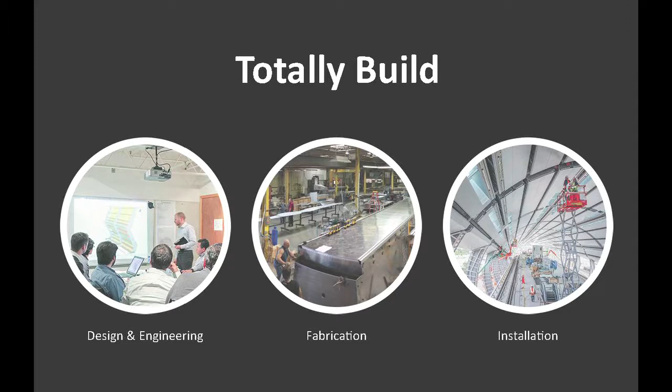So Zahner, kind of what Kramer was alluding to, I don't even know where we fit into this world of contracting, because we really are a unique company. At the end of the day, we're a sheet metal contractor, but the type of projects that we specialize in, which really came about in the last 20, 25 years, starting with a personal relationship Bill Zahner had with Frank Gehry, really got us down this road on inventive architecture, got us in the forefront of using digital tools, and it all revolves around being able to be part of the design process, then fabricate and install. And we do this to varying extents on different projects. Our approach going in is what's best to serve the project, and that differs depending on the project.

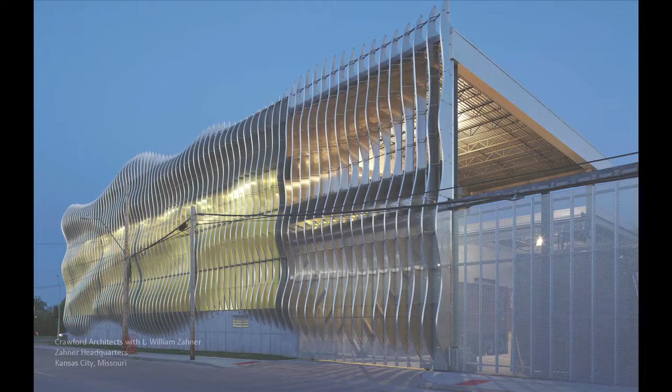We're headquartered in Kansas City, Missouri. Like I said, we've been there. It's 4th generation, going on 120 years. We do have a facility right outside of Dallas where it's mostly production, finishing work. This is our building in Kansas City. We did recently, a couple of years ago, an expansion of the shop floor itself. So this was our way of saying, this is what we do. We designed, engineered, erected this facade, and it's for the shop. It's something we wanted to celebrate because that's really, I think, what sets us apart. We're the ones building it.

Oh, sorry. So Bill Zahner himself, he's written 2 textbooks, really references for the architectural industry. If you haven't seen them, I'd encourage you to look for them. And I was kind of interested too, what's our mix here in terms of students and professionals, practicing architects? Got it all? About 50-50. Good, yeah. So this is really a strong reference in terms of thinking about metals as a material, different properties. And we've been building all over the world now, primarily in the States, but more and more we're seeing a demand for this type of work all over.

But let's start in New Mexico. This is the project that Kramer was talking about, the so-called turbulence house. Steven Holl project, he called us up and said, I've got this model, and I want you to scale it up, make that back wall 22 feet, whatever it is, and let's do it. So he sent it to us. That's where we start. We had to scan it in, do a laser scan, and it was an interesting proposition because now it's quite literal. There's glue marks, there's creases, and within the scan, it's at such a high resolution, you actually are seeing that. And there were cases where, just very subtle shifts in the geometry, and now you're in the position of, well, what's really the intent here, and what was just some guy's finger holding it too tightly.

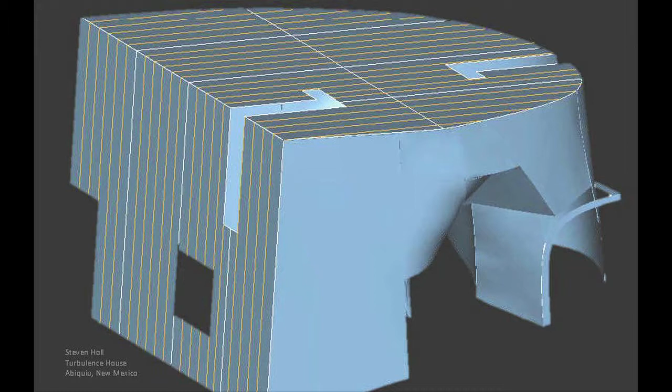And we had to go through, and a lot of time and energy was spent in kind of rationalizing this model, getting it into a shape that we could build from. And this is, like you're saying, 2002, I think. It was still rather primitive in terms of technology. But we had already established this type of construction, which is why we had been working with Steven anyway, and it's why he approached us with this project. So you can kind of see this, it's a mix of planar surfaces, which are fairly straightforward, essentially stud wall construction. And then these curved surfaces is really where we are using what we call our ZEPPS technology, and we'll see some more examples of that later.

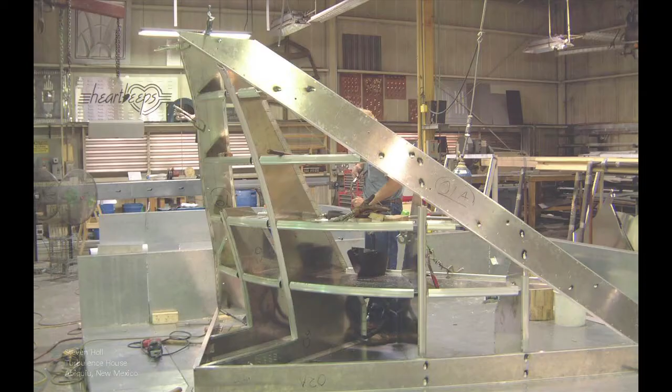But it's our way of slicing this volume up into sections that essentially we're bound by what we can ship, more or less. We work within the geometry and then the constraints of shipping. But this will show you how we think about it in terms of cutting it up and making it into sections and actually fabricating. So it's in the computer model. We can export the data directly to CNC equipment and then assemble it into very accurate geometric forms. That's what you're seeing here. So the other advantage is, we try to push as much of the work into the shop environment as possible. So this is the waterproofing layer that's going on in advance.

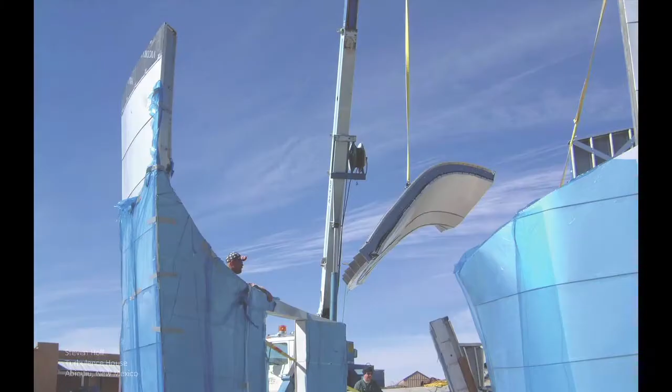And then construction. This had its own constraints, I'll say, challenges. But essentially, it's prefab. We were given a slab to work with. And these are self-supporting structural panels. So really minimal equipment for what this was. Everything pieced together, very simple construction.

And we're creating really just a shell. It was the fins that defined it. It was the structural members. And then this was also pre-clad. It's a galvalume, it's called.

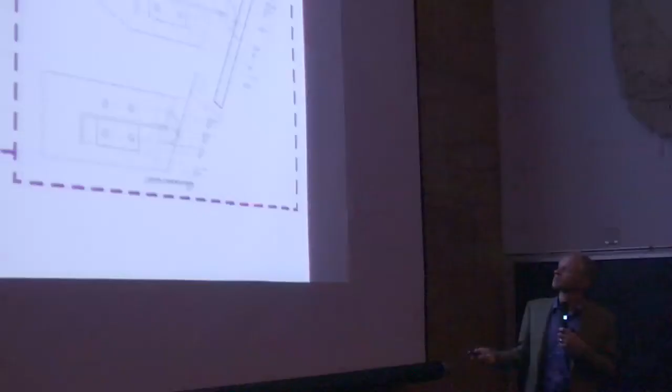So essentially, the project, it's more or less a standard shell of a department store. The client was called Liverpool. They're the #2 department store in Mexico. This is a new development that they were co-anchoring with the #1 competitor. So they wanted to really make a statement with this building. That's why they hired this architect.

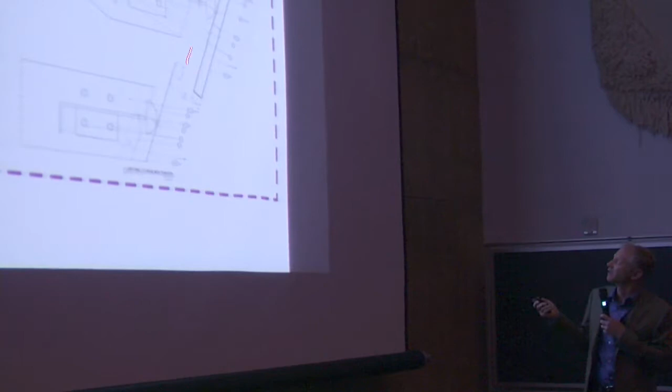And the way we started to look at it was, and we'll see some more geometry, but it lent itself to just slicing it vertically, having profiled ribs, and then connecting these ribs with horizontals. And this was our way of creating geometry. So we've got a structural system, which we had input on the design, and then everything you see here is within our scope. So that's how we're actually slicing the geometry, creating parts, creating assemblies.

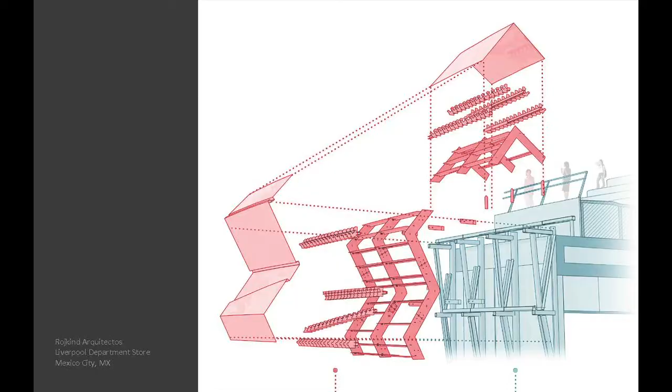In this case, it's Mexico City. We're not installing it. And beyond that, there's not really a precedent for this type of work down there. This is where that strong ownership came into play. They had a precast contractor, did a lot of work with them, and basically imposed this project on them. So that guy came up to Kansas City several times, lots of mock-ups. But it made us think of it a little bit differently than if we were performing the work.

So everything, just for efficiencies, had to be flat packed. There were still 18 semis or truckloads that went down there, but everything individually packed. So now the emphasis becomes, how do you document this? How do you make it as foolproof as possible? And then what's important in the geometry?

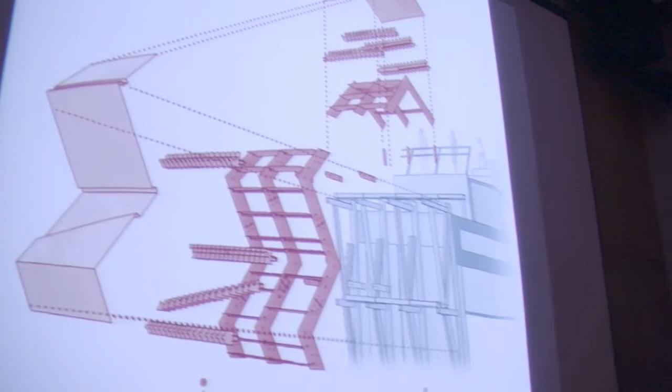We're going to see some more examples of this, but I wanted to point out this is the only thing that we actually pre-assembled at our factory in Kansas City. When you look at this overall surface, and we'll see it a little bit later, what became really apparent was anytime geometry came together, any kind of edge, and even generally speaking, that's what we focus on because that's what your eye sees. That's the critical part that has to be right in the field.

So we said, okay, anytime there's an edge, we're going to pre-assemble these. We call them shark fins. It's a subassembly with CNC cut pieces assembled into a unit that fits onto a particular spot.

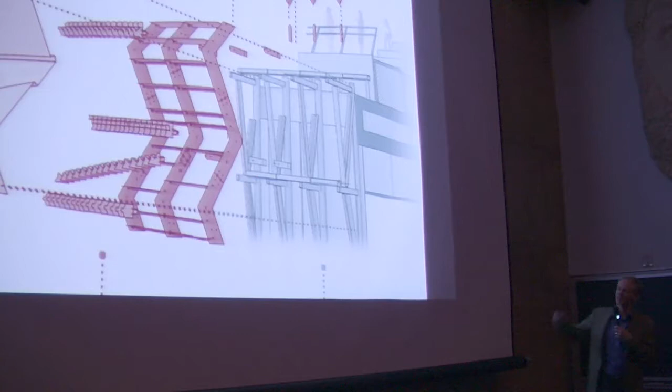And so when we're actually fabricating, let me step back a little. When we're fabricating, everything's done in a model, data is exported, and it becomes essentially a jigsaw puzzle. There's slots in here, corresponding tabs for the connecting parts. We get to the point where we're labeling on each one of these the name of this member. And once you see the geometry, you'll understand that every single one of these pieces is geometrically unique. There's a very slight degree of dual curvature.

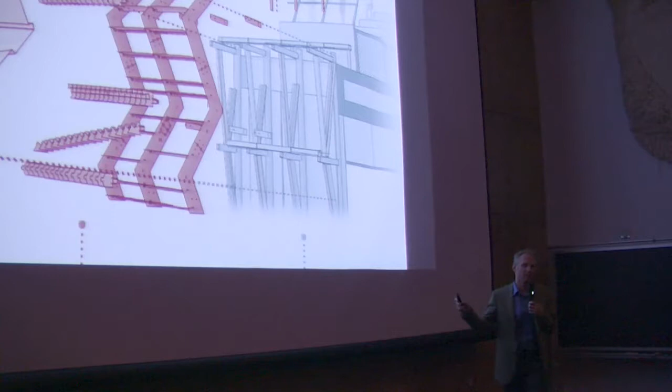So really important, and generally speaking, our approach is we don't try to rationalize the surface more than it has to be. We don't try to dumb it down or make it into consistent units. We don't mind the complexity. Our approach is we'll develop the computer tools, the automation to be able to handle a complex project like this efficiently.

And I really can't overemphasize the importance of mock-ups. Not just for us in terms of construction, but when you're talking about metals in particular, it's just very, very hard to really get an appreciation of the light characteristics, things that can't really be rendered. So mock-ups are always critical.

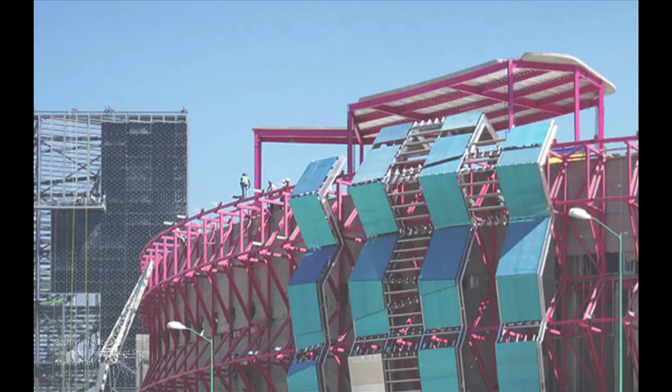This is some of the assembly that we were doing, right? So the pink, and for whatever reason, this client, all of their structure is painted pink. So here we go with our scope. We worked very closely with the structural engineer on the design of this system. And another kind of general statement I'll make about our approach to building complex geometry, we want to keep the steel as simple as possible.

Generally speaking, we're very confident in producing geometric shells ourselves. We've done many iterations of that. We know when we produce the parts, it's exactly per the model, and we've constructed that surface very precisely. The tricky part is getting back to steel. So there's always a lot of different cases, and the approach we came up with here was having these outriggers. It's what anchors the system together.

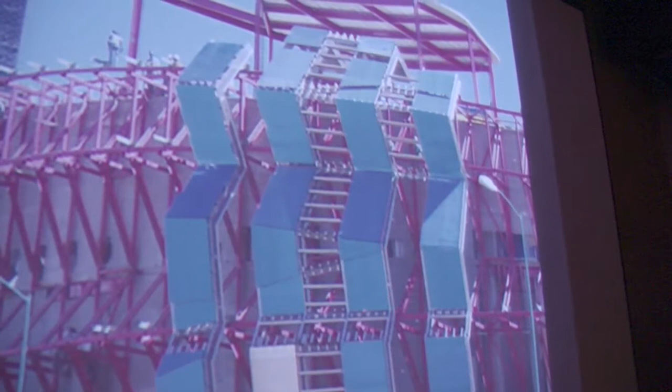Having those set in the field, and what we identified very early on in this process and communicated to the owner was that you need a very good survey company. That's going to be the critical link that makes all of this work together. And that's another role that we play when we're involved early in the design process.

I said we're confident in the geometries that we're building, so we have to be part of the conversation with the structural engineer on what is the tolerance of the system. We'll design that connection, we'll own that anchor, but there is a limit to, on the structural side, what's allowable. And it's not a straightforward conversation.

The types of buildings that we're typically doing don't conform to an AISC tolerance. You can look up in the code and say, I've got a 10-story building, I get 1/4 inch every floor. It simply doesn't apply in most of the projects that we do. So that's a whole step in the process, educating the structural engineer, the steel erector, what the requirements of the system are.

And like I said, we shipped everything individually here. A critical part of what made this a success was the installer had a facility about an hour outside. So he would take every other bay, pre-assemble it at his facility, and could then just hang it in place. So on a typical vertical run, there's 3 individual assemblies that have 4 anchors apiece. And then it's just a matter of infilling with these horizontals.

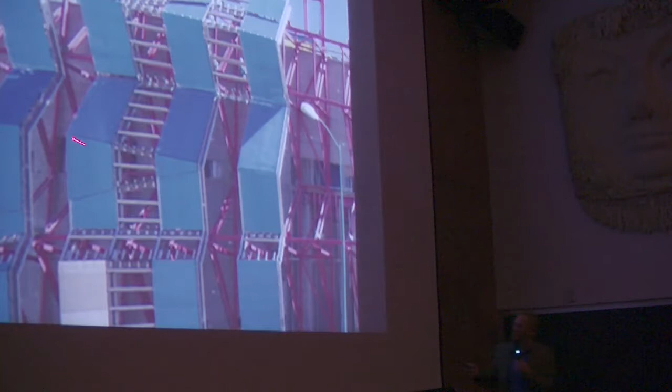And then this is that shark fin that I mentioned, that sub-assembly that is very precisely defining the edge. And that gets followed all the way across every geometry change. We've got that defined. And more assembly. This is very large scale. And it also lent itself, we picked the middle of the building, said you can work both ways out. We needed to put a lot of people on this at one time.

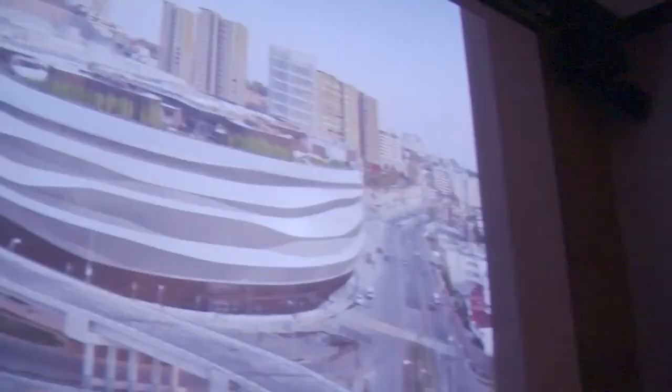So the solid part that you're seeing is actually just a sheathing layer. So we've established this framework. They're sheathing over it with aluminum, it just happens to have a blue plastic coating on it. And then there was a stainless steel skin. So now it's taking shape. You can see all the edges being defined. And this is still not clad in the final skin. It caused an uproar. People just couldn't understand what was going on here. That's the final project. So all of these that you're seeing are actually a stainless steel skin that gets applied over that sheathing layer.

And each one of those panels is unique. It has its own number, its own geometry. And again, that's the strength, the capability that we have to have internally. How do you automate this process? Getting the geometry is one thing. How do you automate getting 8,000 stainless steel skins out, just the files, and then you have to make them.

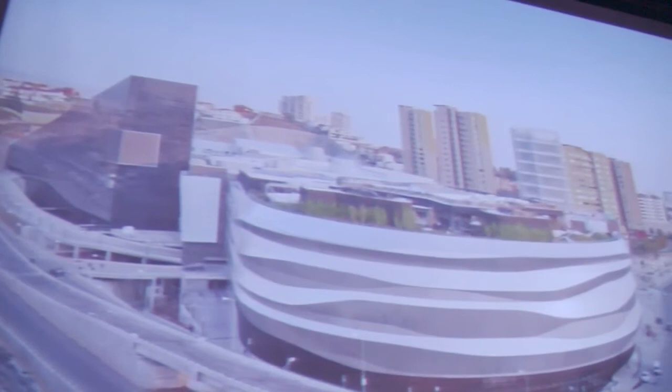But that kind of speaks to the type of project that we do, the scale that we're capable of. This turned out to be just an enormous success for the client. This is actually their number one competitor over there, and this whole development is known as the UFO. It's been completely branded, and in fact, Liverpool itself has undergone a rebranding effort using this type of imagery. So a complete success from the client's perspective as well.

Yes? What's the aluminum layer underneath the stainless steel you're doing? Yeah, good question. This is kind of common construction for us. It's what you're actually fastening into. You've got all this framework here. We're not trying to dictate with that panel that you have to go into, essentially, a stud, if this were a stud wall. So instead of having to find that stud, we're saying give us a sheathing layer, and you can fasten that panel anywhere you want.

So it's important too. When we do more conventional construction, we like to specify plywood sheathing, depending on the type of system, so that you're not having to find the stud and it gives you flexibility on where you're attaching. So is the stainless a standing seam, with fasteners? It was not, and I don't have a close-up of that. It's what we call our inverted seam. So it's kind of a pan. Returns are made inside, so it's a totally flush system with all concealed fasteners.

Very clean. And when you think about it, we're having to pre-make them with the curve in each one. And probably I don't have it on the scale that you can really appreciate. They were 30 inches wide, each individual panel, 16 gauge stainless, with what we call an angel hair finish. And I think I have some examples later on.

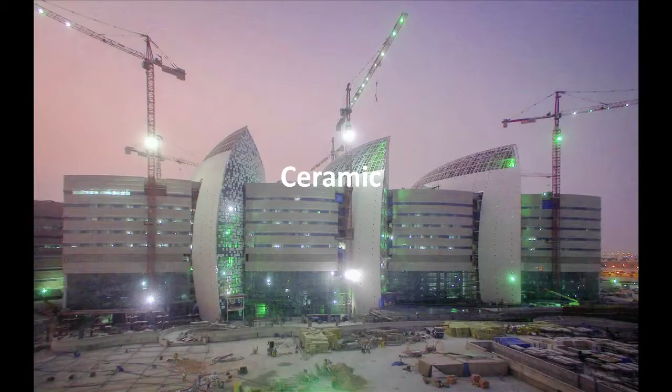More and more we're doing glass. This is a really nice project, and I'll highlight it a little bit later on. McCoy Federal Building in Jackson, Mississippi. We actually did not own the storefront, but all of this glass around here was part of our scope. Ceramic: this is a project in Doha, where we used our ZEPPS technology to define these surfaces, and where we might typically put a metal panel on, this had terracotta tile.

Aluminum, this is the Modern in Fort Worth, the Ando building. We did this as a really nice, clear anodized aluminum. At this scale and thickness, you have to be very particular about the alloy. And what goes along with that is the panel system itself. Flatness was the overriding criteria, so that governs the thickness of the material and the mounting system behind it.

Bronze, this is Bowdoin College in Maine. We did a bronze plate that we applied a chemical patina to. Copper as well. This is, again, copper that's been chemically altered, patina applied to it. There it is.

Couldn't come to Albuquerque without a reference.

But it's true. Chemistry is actually very important to this type of process. So this is the weathering steel that we had on the spaceport building. Lots of copper and copper alloys where we are chemically inducing a patina onto it. You see these cathedrals with 100-year-old copper roofs, some really nice, rich green patina.

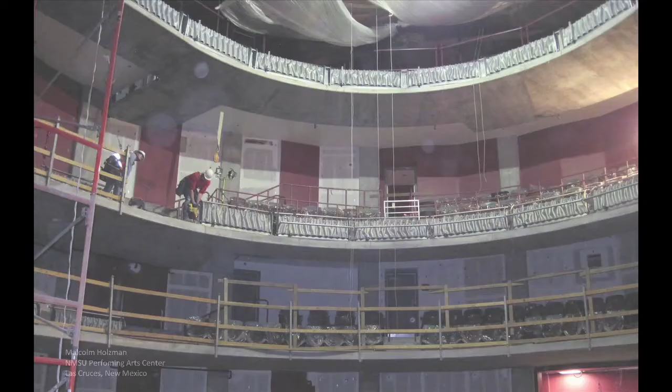This is actually not far. This is in Las Cruces, New Mexico State. We made a series of railings. Malcolm Holzman was the architect, and did this series of railings where the infill was this frozen mesh material. That gives you a little better view.

We actually ended up having to hire that original artist to make these forms. We just couldn't, it's one of these things, again, you can't specify it. It's something that you just have to have an artistic ability for. So occasionally we will bring in artists into our process.

We'll talk a little bit about the de Young, really important building for us and for the architect. We owned all the copper, but then we really owned much more. Our scope was the entire envelope, with the exception of the skylights. We owned the complete exterior. So again, mock-ups, lots of mock-ups. This was a really interesting process.

Herzog and de Meuron, because they're really tactile. They like to play around with materials. So they'd take plastic sheet and heat it up and press different shapes into it just to see what they liked and how light would respond to it. And they'd send that to us, and then we would simulate that, alter some tooling for the shape.

So one of the things I wanted to point out, and this is a very early mock-up, all the variables. So the other thing that we have to interject into this design process is constraints. And in this case, there are a lot of them. And just on this panel, it's copper, but how thick is it? The thickness that you choose really sets the limits to the depth of this bump, which is another variable.

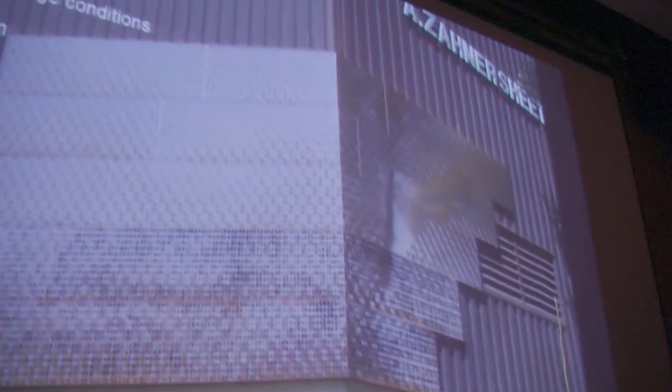And then how many steps are you going to take within this depth? We've got bumps in and out alternating, and then a certain number of steps within that. It's a very strict grid system. People are always amazed at these wild Frank Gehry surfaces that we do, and I tell them, you can be a foot off on the Gehry stuff, and no one's ever going to know.

And you cannot be off at all here. It's a 400-foot-long facade, and we're wrapping the corner, and that corner has to be between the grid spacing. I mean, there's zero tolerance. It's a pre-manufactured panel. There's no field measuring in this building at all.

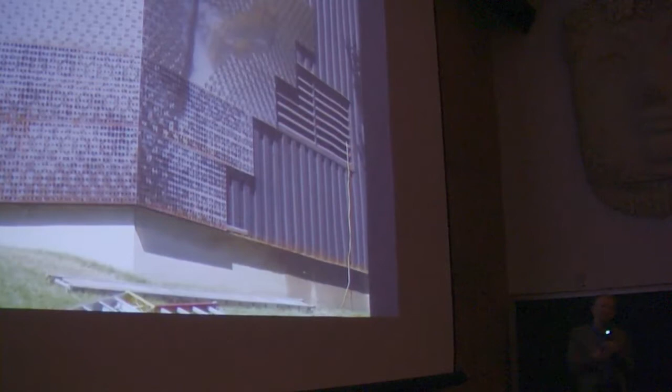So, there are panel restrictions: how wide, how thick, how long. That has to do with tolerance constraints in our equipment, but then also on a practical level, how are you controlling flatness? How wide is this? The corners themselves. We decided that we had to literally fold that corner in within one panel to get that edge that they were looking at.

The fastening system itself, again, no exposed fasteners. So it's actually a very clever system that we used, because the flip side of this is we're installing it. It's got to be efficient to install in the field. And that's another reason why you have to see this through the entire way. There could be on paper a very clever way to fasten, but if it takes twice as long to install in the field, you've killed yourself. It's not even worth doing.

So all of these constraints are kind of interwoven too. When you change one, you're impacting others. So it's part of the design process. We just have to go through, figure all these out, and then communicate back to the architect. And that's where we really have to find out what's crucial to the design intent.

Which do you prefer, the more precise stuff that you're showing now, or the more wow, Experience Music Project, for example? That's really hard to answer. I mean, as an engineer doing the challenges and so forth, in one sense, it's almost a luxury with this because it's about precision. And so we can think in those terms and we can quantify everything. We can go through and say, we need X amount of tolerance in this connection because of these variables. So you can follow that through.

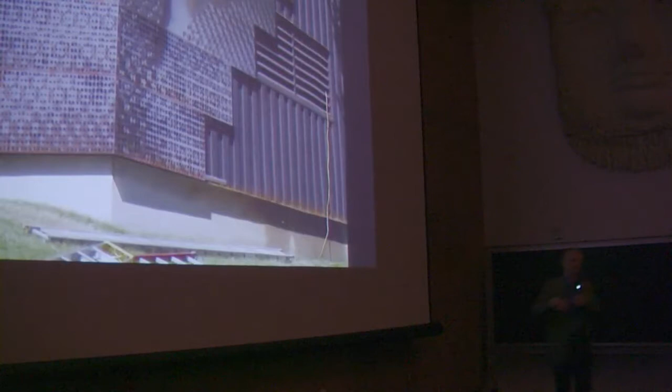How often are you actually doing the weather wall? You're usually a skin that's held off the face of the... It all depends. On the de Young, we were the waterproofing layer. So there's a stud wall, there's a DensGlass sheathing, and then we owned everything outboard. So that was the waterproofing membrane, and then the panel system itself. The panel system is designed to take water out. By design, we're not letting water even to the waterproofing layer. It exists, and there's good reason it exists, but that's not the primary barrier.

Do you have freezing problems there? Not in San Francisco. It's a common issue that we have to design around. Gutters, a common case, depends on the project. Minneapolis, for example. I don't know how that's guttered. We've done Gehry projects that have internal gutters, where it'd typically be maybe a 20-foot welded assembly. So you're dealing with discrete units. If freezing's an issue, heat trace is actually fairly common, so you're not building up ice.

We owned all the glass. We owned all the glazing frames on this. We were essentially a little GC out on that job. We had 10 or 12 subs under us. And this was all really design driven.

The glass frame itself, it's custom, but it's made of conventional, that's a channel. It's a pipe with a T welded to it. That's a T section. They're all standard shapes. So we had a miscellaneous metals subcontractor making glazing frames, sourcing the glass itself. It was very comprehensive. There's a TPO roof under the copper roof that we owned, the entire envelope.

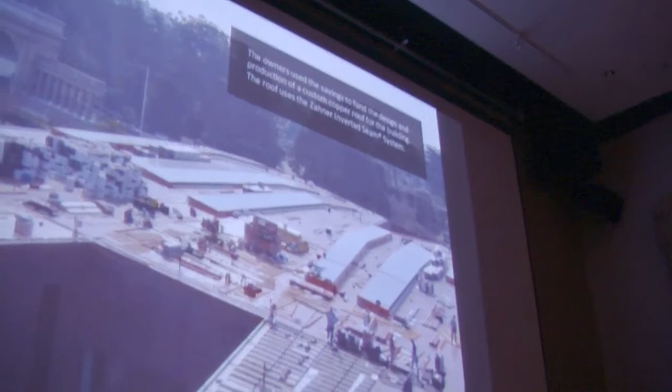Typically we'd use an aluminum extrusion, but there's a galvanic reaction between copper and aluminum that we wanted to avoid. So actually a roll-formed stainless steel track that we laid in there with clips that would receive the copper panel.

And there you go. It's a tower. It's got 30-degree twist. Honestly, one of the biggest benefits we had on this job, we were involved very early, and we have a very strong relationship with a copper producer. So we were able to buy the copper at a very strategic time. It soared after we purchased. I mean, we were scrapping copper for more than we bought it for at the end of this job.

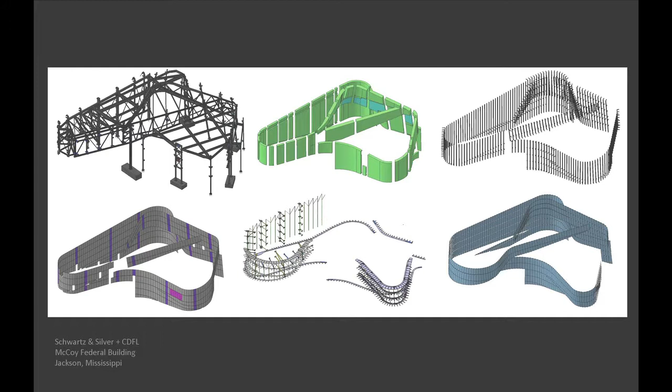I've talked a little bit about ZEPPS, and it's our approach to defining geometry, essentially. It's the McCoy Federal Building. This was a case where, again, design assist, and it's a federal project for one, so obviously there's some guidelines on single sourcing. And so they went through a whole exercise. Okay, I got steel, I got metal panel, I've got some structure, I've got all this glass. How do I hold up the glass? Lots of different systems, and in addition to that, there's skylights and roofing.

So there was an entire effort to bid this out, and it was completely outrageous, way beyond anything that the budget could sustain. So we came in and said, okay, we'll just own this whole scope, because really it's all interrelated, right? With the exception, we didn't own the structural steel, but we designed it. It got bid out to a steel contractor. But there was just no way to piece this out.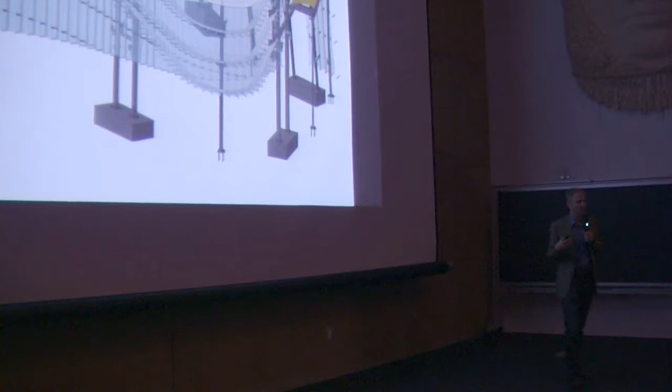Everything's dependent. To do it efficiently, the glass system has to work with the metal system, which has to be supported intelligently. One of the things we do with this ZEPPS approach is try to minimize structure. More often than not, we're taking steel out of a project because we don't want it to define geometry. That's what we're going to do with our system. We build structural panels out of aluminum framing. So we want to minimize structure because it's where you have your largest tolerance anyway.

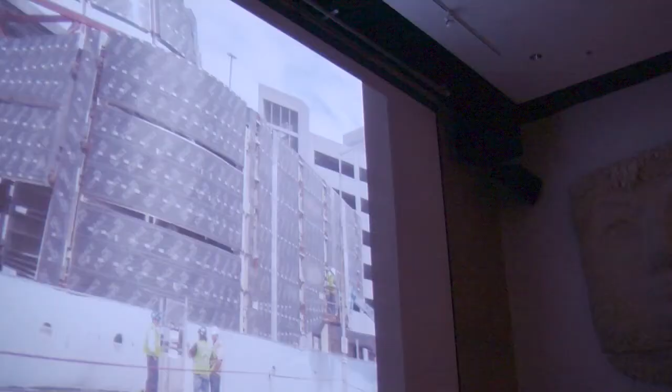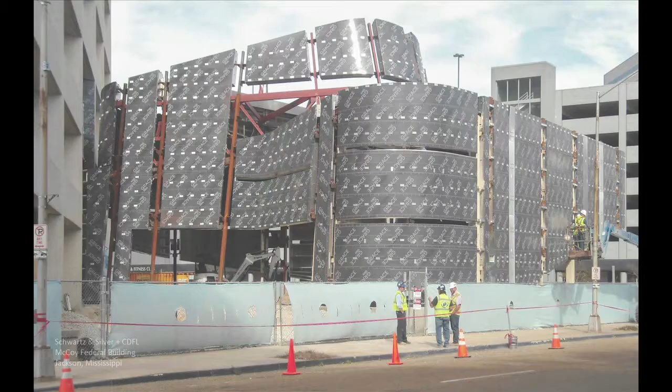Mock-ups, I can't say it enough. We've got 2 towers now in Kansas City that always have mock-ups on them. In this case, we're mocking up this glass system with this aluminum outrigger. And this is how it's coming together. So these are the structural units, the ZEPPS as we call them, that have the exact geometry prefabricated in our shop, membrane put on beforehand, and then just simple anchoring connections to a simplified structure.

And that's what it looks like. It was a really successful project. Like I said, it was up in the air for quite a while whether or not this could even get built. And it was something that took that design assist effort to realize.

This is a fairly recent project in San Francisco, UCSF, and I like to highlight this one because it's a little bit different than what we would typically do. We got a call from the architect, WRNS, the guys that we had worked with on several other jobs, local San Francisco company. They said, we're in a competition. So we're teamed up with the GC. There are 2 other teams we're competing with.

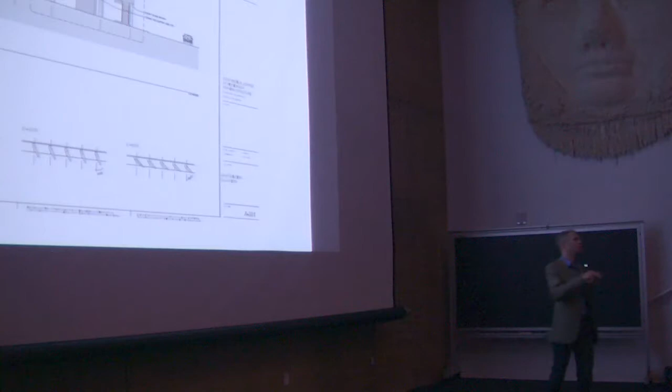Parking garage, 10 floors. We've got a concept for the facade. And if you think about it, what's a parking garage? You're not going to differentiate yourself with the angle that you're parking cars in. It's all about the skin. And so they had this concept and a crazy budget constraint. It was literally half of what we had done a garage with them across the street for a couple of years ago.

It was $42 a square foot installed in San Francisco, the highest union labor rate there is. And we said yes. It's part of our culture too. We don't like to say no. We want to explore opportunities. And we said yes because we knew we could work with them, for one. And they had a very solid concept that we knew had efficiencies that we could exploit.

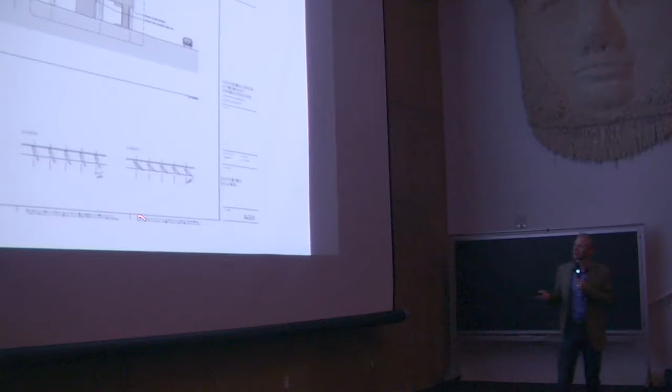So the concept was, let's take louvered fins across here, put them in different shapes, and that's the skin. So it starts out with just some hand sketches. How do we unitize this? What are some systems that we can explore? It's all about efficiency. We went through a lot of iterations on the shape of this. So one thing that we identified very early on in the process was the cost driver was going to be that part. And there's so many of them.

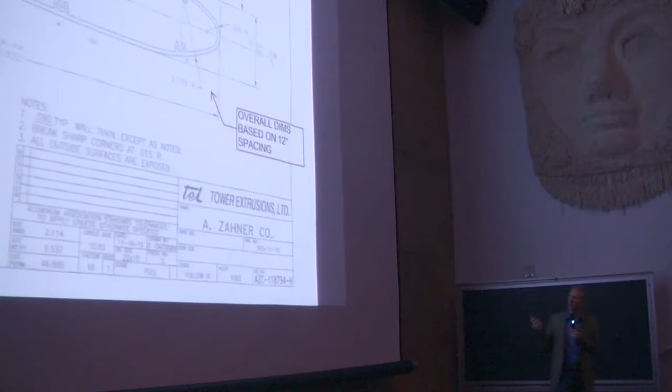You know, a lot of times it's not about material. And people can get caught up in materials. And you'd be surprised how little of a portion of a job that can be. But in this case, it dominated. So the on-center spacing became the one critical item on a cost basis. So we established, okay, we can live with 12 inches on center, and it was originally shown at 8. We said we need to bump this out to 12, but let's find a shape that works for us.

So we do a lot of extrusion just within our systems, a lot of stuff that's not ever seen, but designing with extrusions, there's a lot of benefits. You can take out process, use of material is very high, little waste. So we've gotten good at designing extrusion. We work very closely with an extruder in Texas. We said, okay, let's work within a 12-inch diameter because there are efficiencies for extruding. Technically speaking, you can go beyond that, but there are implications. So let's work within 12.

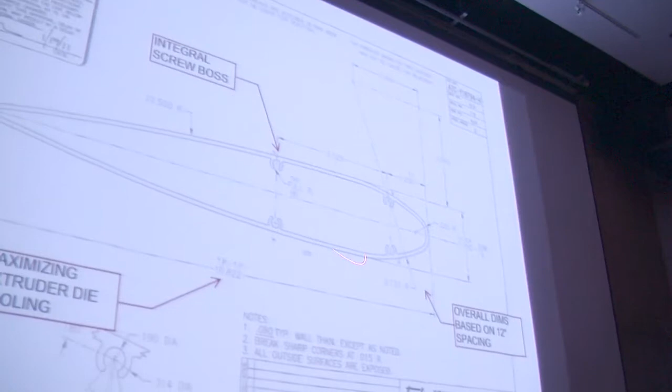And let's come up with a shape that, on a design level, you guys are happy with at this 12-inch spacing. And then beyond that, in this case, we were designing screw bosses into the extrusion itself because that played a very important role in the system itself. Head and sill extrusions, again, custom extrusion, but on any kind of scale, it becomes very economical. Tooling cost, that's probably a $9,000 die to make for the tooling itself. This is probably $3,500, something like this. But those costs are realized very quickly with some of the advantages that you have.

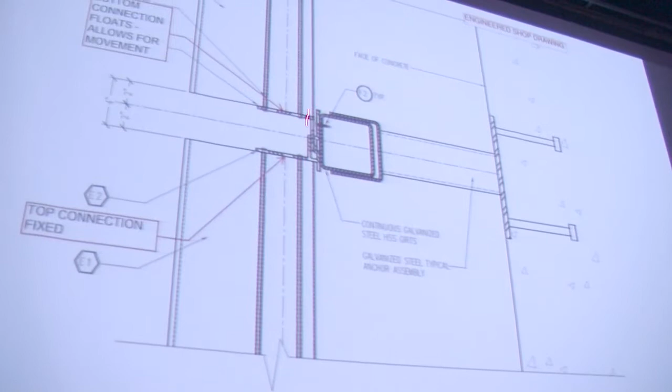So designing this extrusion, coming up with a system now. So we've got the louver, we've got this head extrusion that will fasten into the structure. We own the structure as well. That was all included in that budget. And then the receiving, the upper unit can slide into. So you're only fastening across the top. And again, anything that impacts the field has huge cost implications. So anything you can do to simplify.

In this case, we've got an 8-foot wide unit. It takes 5 screws into that tube steel to support it. And it's dead loaded on the top. It's allowed to slip in the pocket on the bottom. We've resolved any of the movement issues seismically. It's really nice. So you've got to buy a lot of extrusion. Then you've got to buy more extrusion. That was the advantage of this job too. 4,400 pieces of this, but they were all exactly the same. Same shape, same finish, and same length.

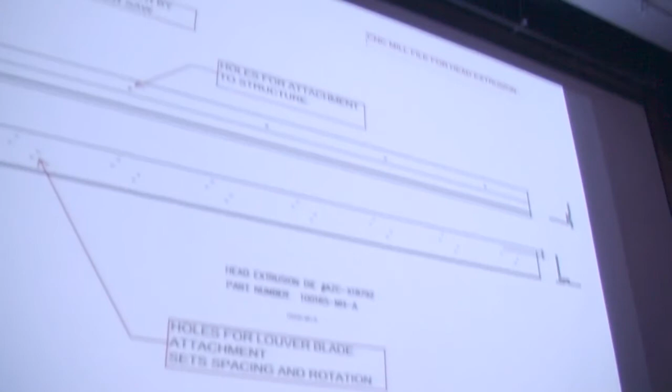And we could pay the extruder a little bit more money and have them cut precisely so that we're not even handling it beyond that point. And that's just coming up with the system itself. This is that head extrusion. And we have CNC milling equipment made for extrusion. It's typically what curtain wall contractors would have. But we do a lot of extrusion work. So we've got a mill that can put the holes in at the given angle, dimensionally located. We've got CNC saws that cut this, so we're very confident.

This is that processed piece. It's cut to length. It's got the holes in it. And now it's a very simple jig. This is where we're screwing into the screw boss of the louver blade itself. Very simple operation. So are these louvers fixed? Fixed, yeah, absolutely. And only 5 different angles. So that was another thing. And it's an interesting point because we gave them the opportunity, even though this is such a low budget. We said, we've got the CNC capability. You can change that angle. So these are the 4 holes that are put in with the CNC mill.

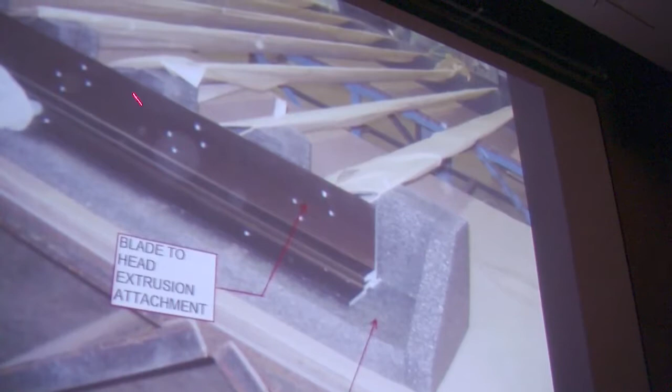If you wanted that to be 1 degree rotated, half degree rotated, you could sweep it across the entire building. We don't care. There's a little bit of cost because of exporting the files, but that's all automated. We do the computer work, we do the programming within our systems to generate that. So there's very little cost involved with that.

Now that would be a particular unit, and maybe it's a one-off out of the 200 on the job. So you have to track it. It's logistics from that point. But that's stuff that you can control, and it doesn't have to be a big cost driver. But the interesting point was that that was not their design intent. We gave them the option to do something more complicated, but it didn't meet their original design.

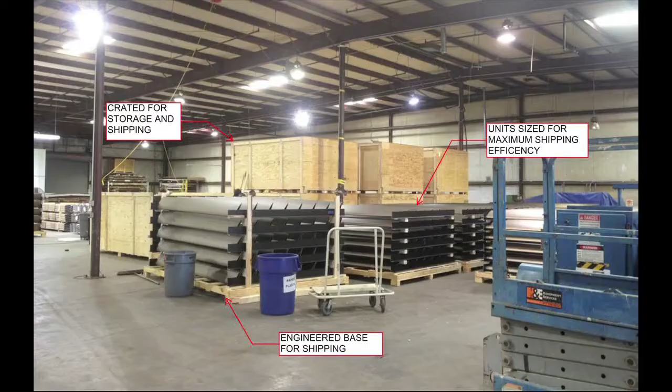Packaging and crating, shipping is an enormous consideration. And that was the number one decision we had to make on this project: do we prefabricate? We could have had 20% of the trucks going out if we had just shipped parts and not prefabricated units. And it's a parking garage, which is a luxury. We could have the top deck to ourselves. Usually space is a big constraint. It wasn't in this case. But your labor is quite a bit higher in the field, and you still don't have that same level of control.

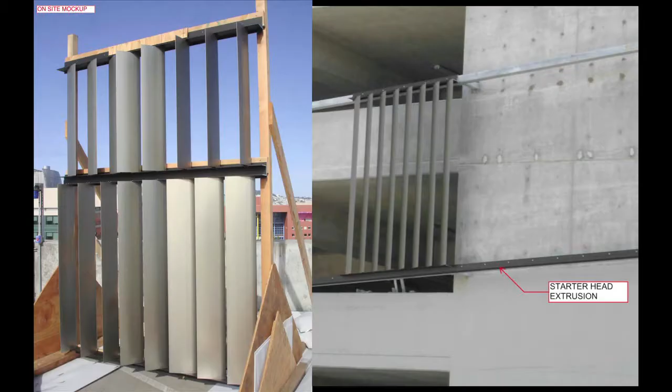So again, a mock-up that we had made in Kansas City, shipped to the site, starting to put on the units. There's a starter extrusion that receives that first unit. Handling, always a big consideration, but really nicely resolved in this case. And then you keep stacking them up. So very efficient in the field to do this system.

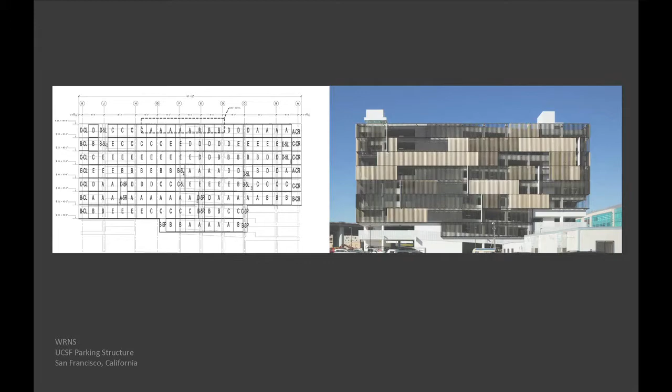This is the map that we produced. This is actually the one constraint that we imposed on the designer: we said, make these in 8-foot units. So wherever you have this across, our one unit is 8 foot wide, that way we can maximize our shipping. If we went back to the original layout, the different lengths were arbitrary. So we said, that's a move that we can make to make us more efficient.

So really, really successful project. And actually this is kind of a trend that we are seeing, some very nice parking garage design. Particularly, we've done a number of projects in San Francisco, and cities now are starting to get involved on a level saying, don't give us a bland, boring garage. We need something more than that.

How do you price this? Yeah, interesting. We had it told to us, so we had to agree to it. There was a budget established right up front. Not a cost plus. Not at all. Fixed. Normally there's a lot of back and forth, and we're making changes and decisions. This was a case where it was established from day one. So if they won the project, then we were on the job for that budget.

Normally, that's another function of design assist, where you're working through the budget through the design process. So we'll set it up where it's a very small design assist contract where we're working directly with the architect developing a design. In that case, maybe you don't even know the material. So there's a lot of variables at play, but the budget's established and we're designing to that.

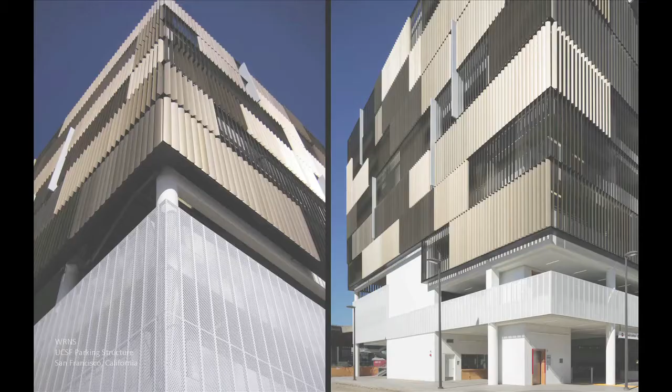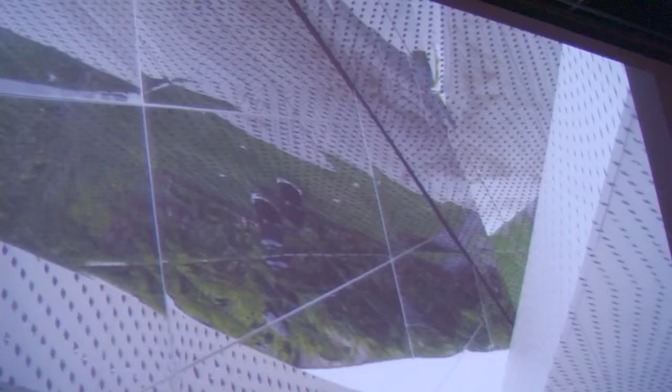Crazy projects. There's a lot of mirror stainless. This is a canopy where the pattern's wrapping around all three sides. Some signage. This is a facade actually in Kansas City where we're using a couple different things. So we're varying; this is the solid portion, if you will. It's just a very sparse perforated grid.

We're also applying bumps, actually the same tooling that we used on the De Young, we used on this. And in that way, we're putting, in effect, signage into the facade.

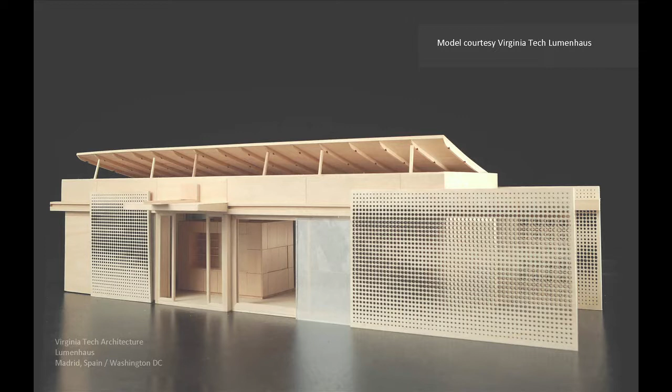This is a student project, Virginia Tech, part of their solar decathlon. And we worked with them. So instead of just perf, we left this tab that could be rotated at a particular dimension to give you a kind of a sweeping effect. How are those discs attached? We're just not cutting through. So we're leaving a little bit of metal, enough so you can give it a twist and it'll stay.

So yeah, the next step is to automate this. We're talking to Morphosis right now about a project that they want to use this on. It was student labor, so we had that advantage. And actually, we shipped it flat to them. They bent it in place.

Although you can find a video on YouTube where they have a robot with a very sophisticated armature that's bending these. But actually, I talked to a student years later. He's like, oh, no, we bent those all by hand.

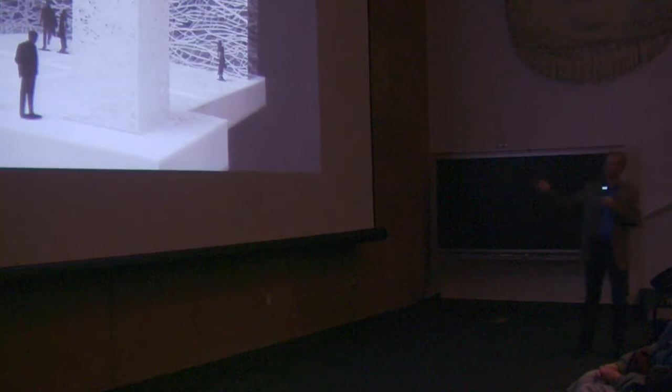Artwork is also an important part of what we do. Typically, it's big-scale art that's beyond an artist's studio's capacity. I've done quite a bit of work with an artist, Jan Hendrix, out of Mexico City. This was a big project that he had in Doha. So it was a courtyard, and this is his plastic scale model. And this is very representative of his art. It's very organic, but he wanted that translated into metal.

So there's a lengthy process, and it was important to go to his studio and really outline the process. He does things by hand. They get digitized. He actually blows them up to third scale, mounts them on a wall, has a team of artists with Sharpies just filling in, making nice smooth corners.

And now it's too big, though, to scan, so he takes very high resolution photographs of the wall and then digitizes that. That gets it to a format that we can take, and we have to do some more processing to actually get it to a format where we're cutting it. We've got a 10-foot by 20-foot water jet at our facility that we've used for this. This is half-inch aluminum plate.

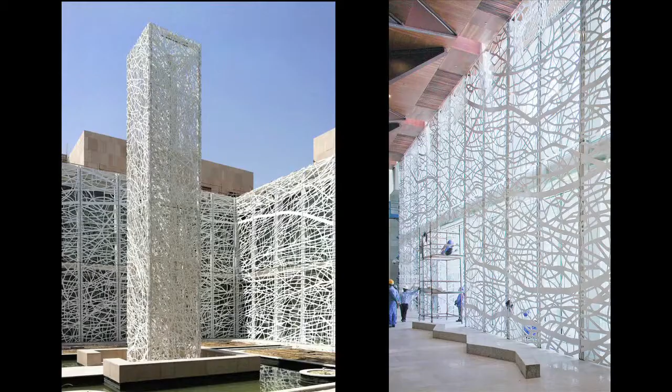But then it's also designing what you don't see, I don't really have time to get into, but it's the whole hanging system that works with the artwork. And on this type of scale, so this is in Doha being mounted. One panel is that size. There's two on this elevation. But everything is working together. And then this column in the middle, there's actually two columns, an inner one. Artwork that all works together.

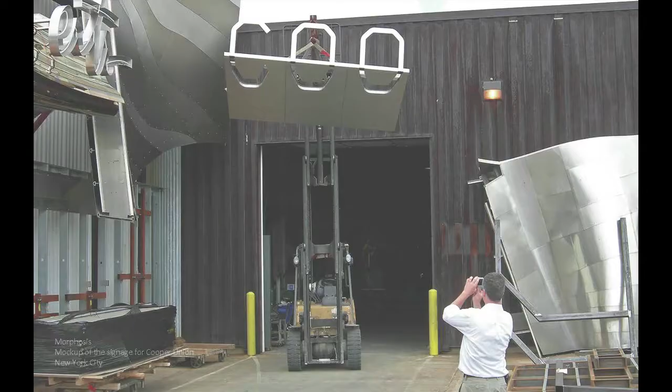I'm going to go very quickly through a series of slides. Cooper Union, big project in New York that we did. And again, this was all about unitizing. So it's aluminum frame construction. And this is actually a trend that we're seeing more. This is actually a very simple box with a conventional window wall, and then they're using the rain screen to be expressive. So we like that type of construction.

So perforated skin. One thing that was determined, this is a common panel actually, where that corner has that same pattern. So in this case, we could save some money by purchasing this. We had to work with a perforator, but it could be done on kind of industrial scale as opposed to us doing it. Our capabilities are more for kind of one-off, and it has to do with the type of equipment that's used to perforate it. But then that panel can be rotated all around and come up with a larger pattern on there.

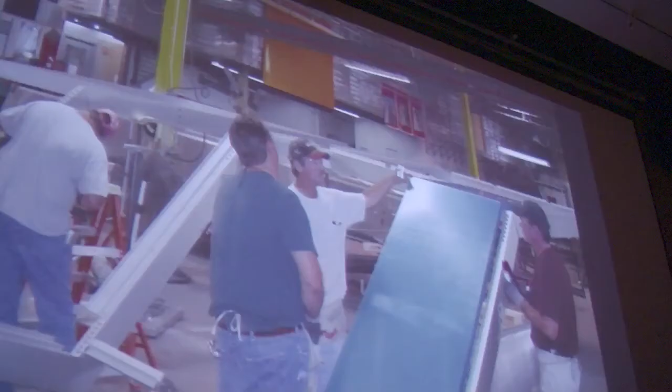But in the shop, it's all extrusion work and very complicated connections and geometries where we're actually bending the extrusion and then pre-mounting all the skins so it can be handled as a unit. And again, you can't underestimate this part of the project. I mean, shipping can be an enormous cost.

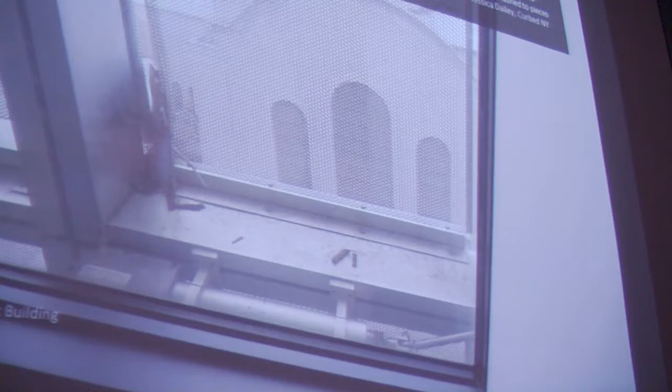So it also had, these are operable windows. They actually have actuators down there. This is during Hurricane Sandy. A chunk from a water tower came off and got embedded into this screen. But the owner's actually really happy because he's not replacing glass now. He's replacing a screen.

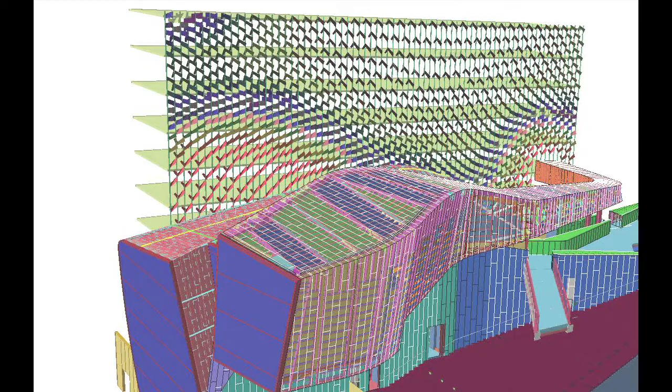Very intensive computer modeling. A couple different systems. These are the big ZEPP panels that we talked about earlier, that get a cladding on them. And this is that scrim wall. And these are actually just screenshots. One of our engineers keeps a log of these, and this is how we're communicating with the field.

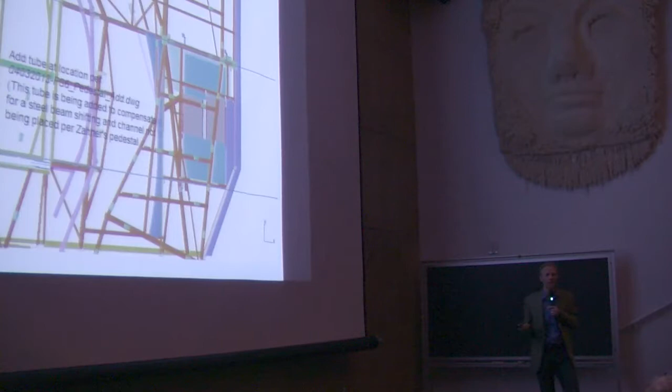We're installing it ourselves, but what that means in the union world is we can send 2 guys out, and then we have to hire locally, which can be really problematic. So communication is really the key. So we'll make notes, and our field guys are actually quite savvy with not manipulating models, but being able to use models to see things. So we'll point out as part of the design process where we see potential problems.

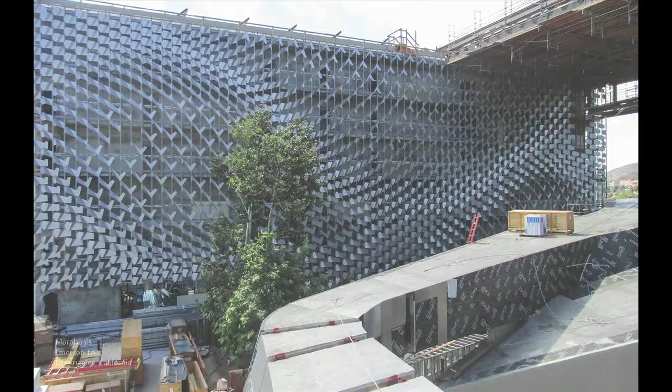So this is under construction. You see, these are those large panels; we were able to stack maybe 3 or 4 of these on a flatbed to send out. And the advantage of this type of construction is we had every one of these completed before the structural steel was done. So we can cut a lot of schedule out on a typical project. Scrim wall going up. Really exciting project. It's right in Hollywood.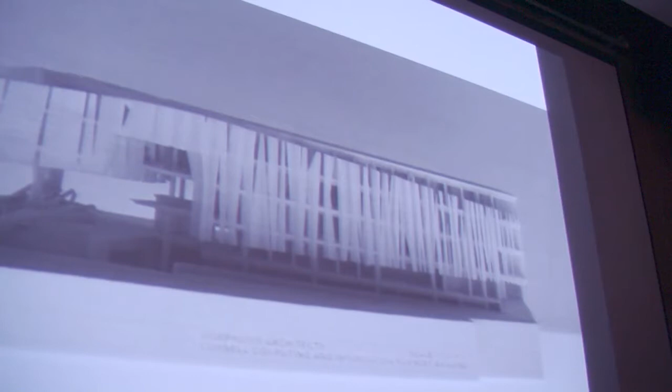The overall form didn't change a whole lot, but this was just not something we could resolve. It was primarily a structural issue, how to support these skins. So, with our input, they had to really change the entire concept of this skin, and it moved to a horizontal orientation. And then that opened everything up, because now we're working with glass.

We're actually using the mullions to support off of, and it became very economical. The glass guy could install it himself. He's right there. We're prefabricating these individual units, of which there are many, many varieties.

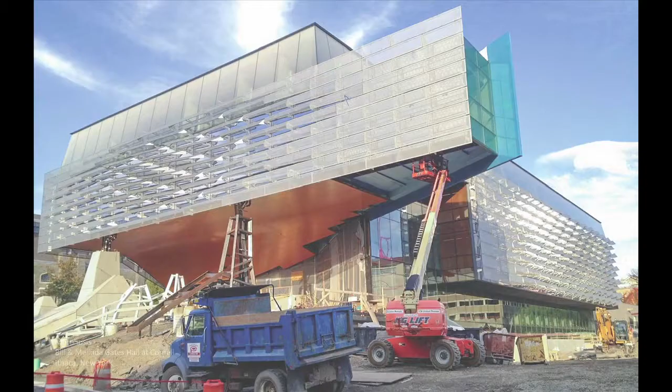But the erection itself, which is always the thing that we're trying to minimize, is very simple. It's 8 bolts into a tab that's already on the mullion, popping out of the seal. So assembly is very quick.

I did want to bring up, we also own this soffit area, which in a lot of ways is very gratifying. It was not even a scope we were looking at, but they couldn't find anybody to build this. The scope was awarded to the stud wall contractor, and they just had no idea how to approach it. So we took it, said, okay, you've got your surface.

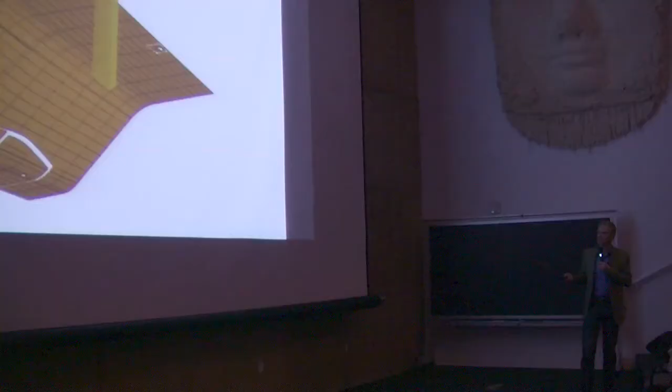We're going to make a rigid panel out of each one of these. And that way we're controlling geometry. They went into this thinking they could do it like a hung ceiling. And this is a shop drawing. The other advantage we had, in a true plan view, it's an exact grid.

So real rectangle. So what that means is, anytime you have curvature, you have to flatten that, and it's some odd shape. But we use it to our advantage, because in fabrication, what that means, we could set up a jig where, in true plan, we know exactly the dimensions. These are offset dimensions for each corner of that jig.

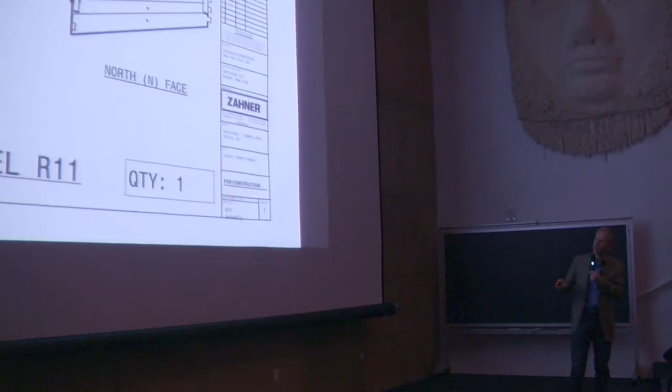All of these parts are CNC cut, tabs and slots. That's the assembly. So you adjust your jig to the dimensions on the sheet, put your parts in, you take 2 cross dimensions, check that it meets those values, and that's it. It gets painted. We had to come up with the whole assembly method, allow for tolerance in the field.

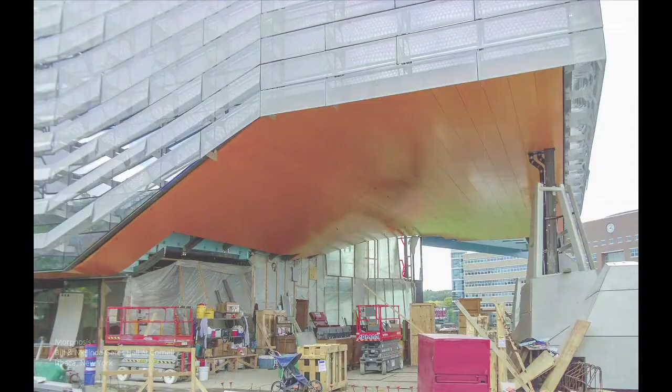But they're 1/4-inch joints. It's really designed at half, if you look at the architectural drawings, and they came back and said, well, we'd really like to see a quarter. At that point, we don't even care. It could be 0. You know, we're butting these things together with a spacer. So there's essentially no tolerance. But we're confident enough in what we're manufacturing that we can achieve this.

I'm going to go briefly. We've had an association with Chuck Hoberman, he's the guy that designed the Hoberman sphere, can open in and out. So he's gotten involved in kind of architectural scale, movable facades. So we do the fabricating for him, and we kind of develop systems with him. And he's just done some really remarkable work architecturally.

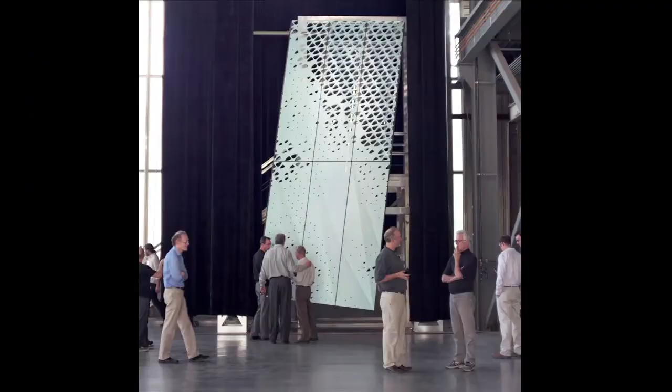We're still waiting for a project. There's one in the wings that I'll show you, but very inventive stuff. This is a built unit at Stony Brook, essentially an art installation. But then we're moving to, this is a project that we're looking at outside of Riyadh. It was Will Bruder, then when he took off, it's Works Bureau now.

But this is the mock-up that we have in Kansas City, it's still in place. These two upper units actually have this movable facade element to them that Hoberman designed, but on a massive scale. It's a huge project, a spa project in Saudi Arabia. That's colored titanium, the material that we're using. Yeah, pretty crazy.

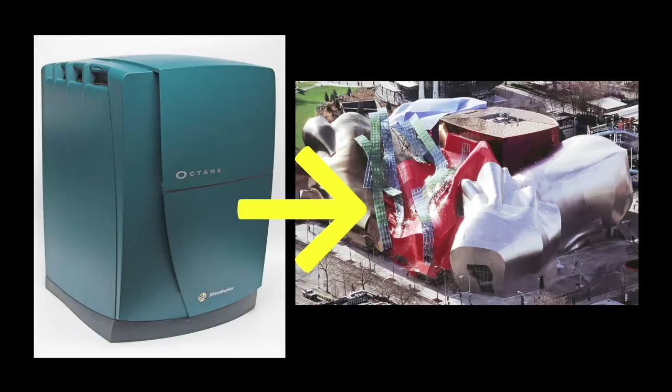And then I'm going to bring it back to Kansas City. This is, again, our facility. I started with the company in 1998. This was our first project, Experience Music Project with Frank Gehry. And I didn't have an architectural background. I had a 3D modeling background, which is what they needed to do this project.

And I thought our advantage at the time was we had 2 of these machines, Silicon Graphics Octanes, they were $25,000 a piece. And I thought, well, that's the strategic advantage, you know. An architect's not going to buy that equipment, and we can do this.

And of course, now hardware is not a barrier at all. You can have a $1,200 laptop and computationally do anything you want. Even software is not a barrier. Everyone's using the same software essentially.

So what I've come to realize is the advantage is not just our facilities, it's not just the workforce, but it's also this willingness for risk, which is really what it comes down to, because this type of architecture, these types of projects, have to have this element of us being willing to do it for this budget without really knowing how we're going to do it. So that's the exciting part from our end. And I'm going to wrap up in just a minute here.

I'm going to go through it because what I wanted to get to is some milling that we're doing, panels where we're pressing forms into it, different shading. Here's what we've run into. There's a perception problem, thinking, you know, I can't use Zahner on my project. How do I interact with them? As a designer, how do I come empowered? And so it's an exciting time for us.

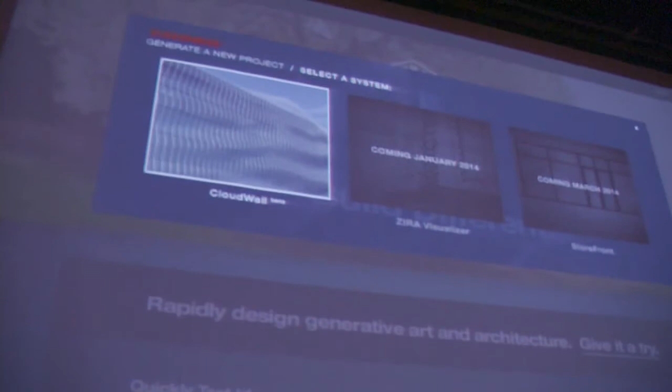We're developing and very close to releasing something we're calling Shop Floor. So in a matter of weeks, you can go to our website, azahner.com. You will see that area. Click on it. What it is, it's a tool that we're developing. It's really a platform. And the first thing that we're going to release is based on what we did at our own facility. The CloudWall is what we're calling it. But the concept is this is a design tool for everybody that's out there.

It's something where you can take a surface and manipulate it. You can define the parameters dimensionally. You can define how dense you want these points. You can push and pull them in and out, and then in real time, it's developing this system. You're giving it a spacing. We've built the engineering, and we've already done this work on the engineering side, so now we want to push this out.

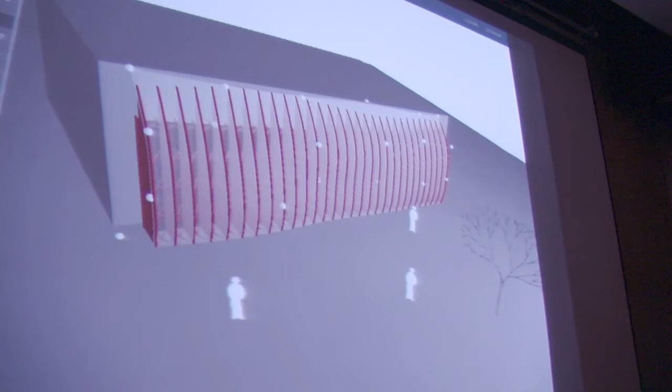The mandate was, how do we make what we put on that wall a product? But not a product like a catalog product. It's something that can be controlled and manipulated by the design community, but it's a direct interface. So that's what we've developed. Like I said, we're very close to releasing it, and there are many parameters.

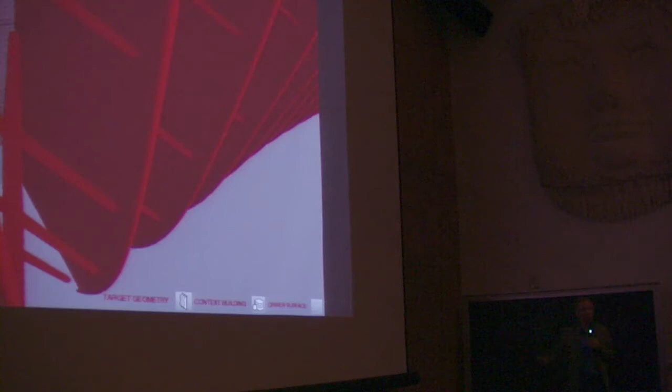This cross bracing is actually individually sized per the geometry. You can apply different geometries to it. There are different tools over here, sliders, and this is all happening in real time. We've got back-end modeling going on that's actually generating cut files for us. So when you're ready to do it, we already know what we're building.

Apply surfaces, different tools that you can use to apply surface to. If you've got an image that you like, that can be the source. So you can pick an image, any digital file, apply that to the surface. Now we're cutting fins into it. Something really exciting, and that's just up to you guys. You want a logo in your wall, you put it in there.

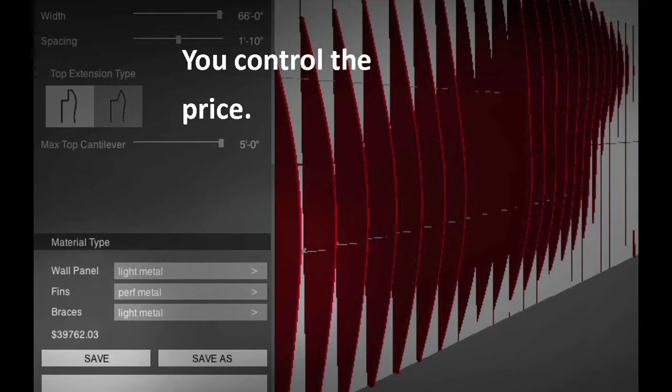This is what we hope is the disruptive component. We're actually going to tell you exactly what that costs. You're picking materials, you're picking finishes, you're telling us where we're going to ship it. We know everything else that's making it up because it's in the computer and we can pull it out. So in real time, you're seeing what it costs. And this has been the barrier and the perception problem that we've had.

We have this reputation, especially on the general contractor level, where, oh, you're using Zahner, too expensive, move on. So this is our way of trying to be disruptive, because we want to give you guys the power to say, no, I've designed this. This is the price. And the way the system works, you're actually issued a quote, and it's got a very specific product number that you can specify.

You can forward that to your contractor or owner, and it's literally the quote. And you can track within the system who's seen it, what they've done with it. So now we want to empower you guys to really have control. And it's a tool, too.

So you can go through and switch materials, and there are going to be some options for the infill panel. We're going to continuously be rolling things out. But you'll see what impact that has on the material choices, the different spacing, the height. So now it's a tool that you guys can play around with.

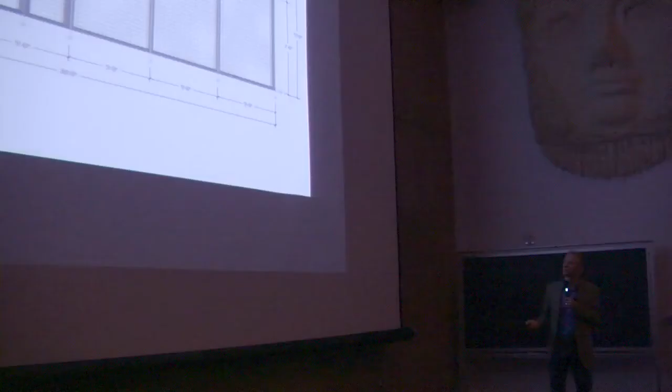And then let's build that into the program, actually make the interface where you're designing the storefront, glass and everything, and we'll deliver that. We're calling it Shop Floor, and in a matter of weeks, it's going to be up.